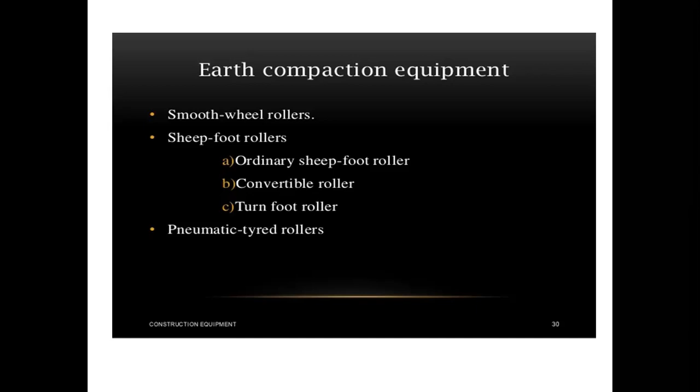What is a smooth wheel roller? These are made up of plain steel rollers and are self-propelled, weighing from 5 to 15 tons depending on the model, used for ordinary rolling work where deep compaction is not required. These are not used when deep compaction is required.

These rollers may have one front wheel and two rear wheels, with the rear wheels usually larger in diameter and the front one being wider. Smooth wheel rollers can be commonly seen on the roads. Each is made up of plain steel rollers of 5 to 15 tons each.

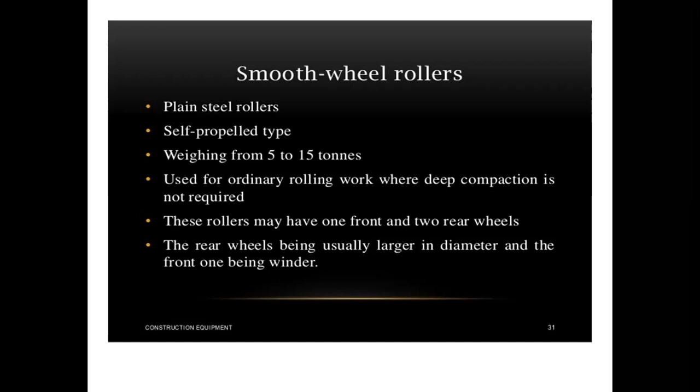The weight of the roller may be increased by filling water or sand ballast in the hollow cylinder. In this picture you can see the smooth wheel roller, with only one wheel in front and two rear wheels. These hollow cylinders or drums can be filled with ballast, sand, or water to increase the roller's weight.

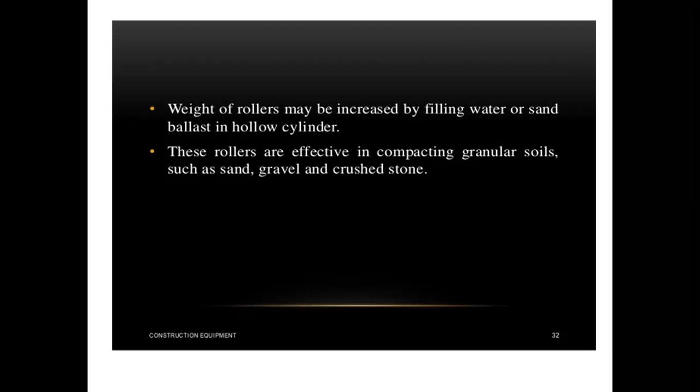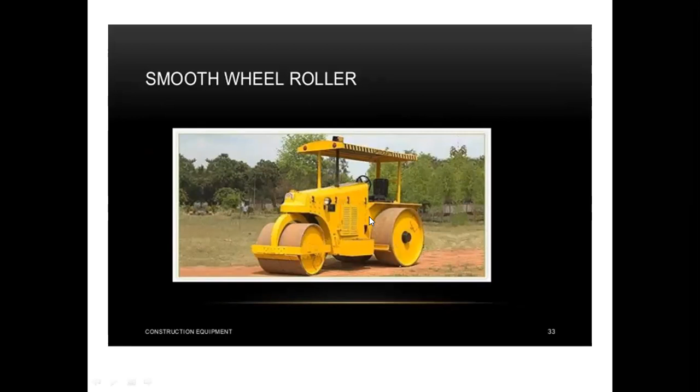These rollers are effective in compacting granular soils such as sand, gravel, and crushed stones. While laying a roadway, the subgrade of the soil is compacted using these smooth wheel rollers. The operator sits in the cabin, the wheel is circular in type, and there is only one front wheel and two rear wheels.

What are sheep foot rollers? These are used for compacting earthwork in embankments and canals where deep compaction into the layer of earth is required, since smooth wheel rollers cannot compact deeply. Sheep foot rollers can compact the soil deeply into the layer of earth.

This gives the best results in compaction when the soil is clay or predominantly cohesive and impervious. The sheep foot rollers may weigh up to 15 tons or more, traveling at a speed of 25 km per hour. As the roller moves over the surface, the feet penetrate the soil to produce a kneading action and pressure to mix and compact the soil from bottom to top layer.

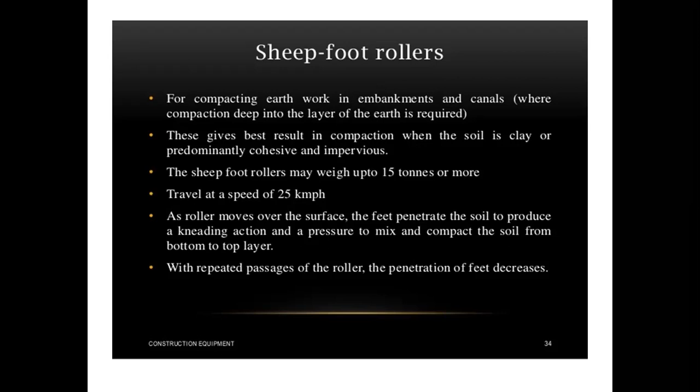As the sheep foot rollers move on the surface, the feet penetrate into the soil to produce a kneading action. With repeated passages of the roller, the soil beneath gets compacted, and the foot arrangements plunge into the earth, so that with repeated passes the penetration of the feet decreases simultaneously.

These are most suitable for compacting fine grained soil and well graded sands. Ballasting is done using either water, sand, or pig iron in order to increase the self weight.

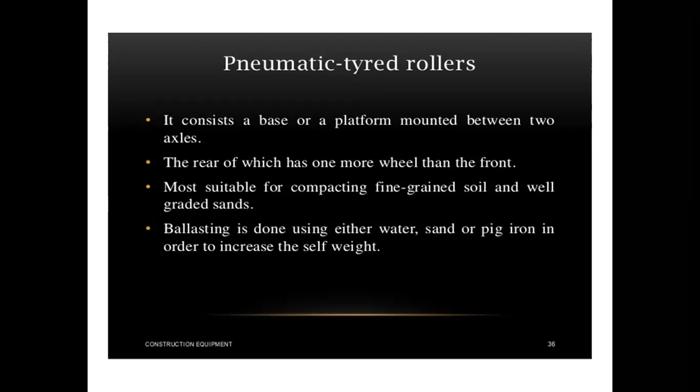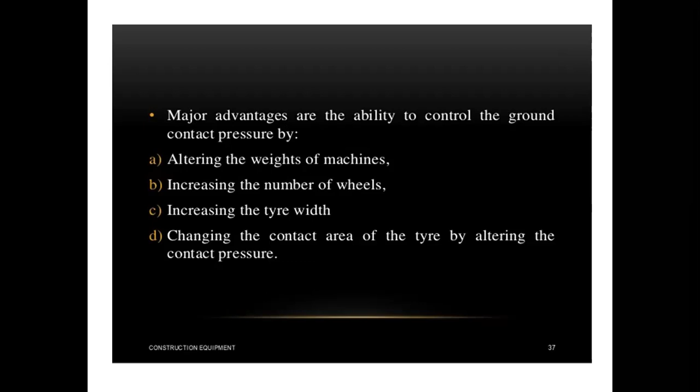The major advantages are the ability to control the ground contact pressure by altering the weights of machines, increasing the number of wheels, increasing the tire width, and changing the contact area of the tire by altering the contact pressure. They can alter their weights, increase the number of wheels, and increase the tire width, changing the contact area so these can improve the ability to control, and the ground surface has been compacted

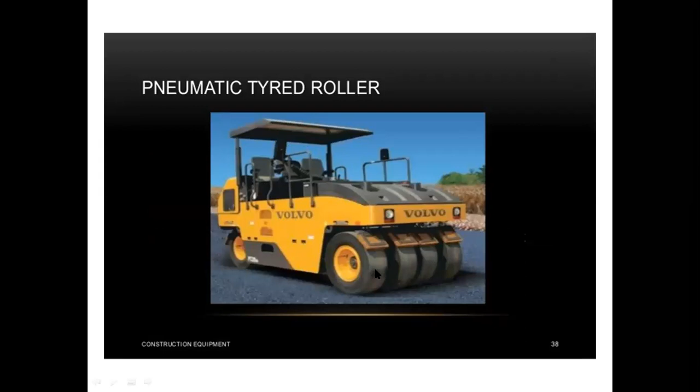So what are the different types of hauling equipment? What is hauling equipment? The equipment used for transportation of materials are known as hauling equipment, or simply haulers. Hauling equipment can move construction materials or soil particles from one place to another, using that energy to move material from one part of the site to another. These equipments used for hauling are known as hauling equipment.

Haulers may operate on roadways or railways. It involves transportation of building materials, carriage and disposal of excavated earth, and also haulage of heavy construction equipment. They can carry building materials like aggregates, sand, cement, and also dispose of excavated soil from the earth, dumping it from one part of the site to another, as well as hauling heavy construction equipment.

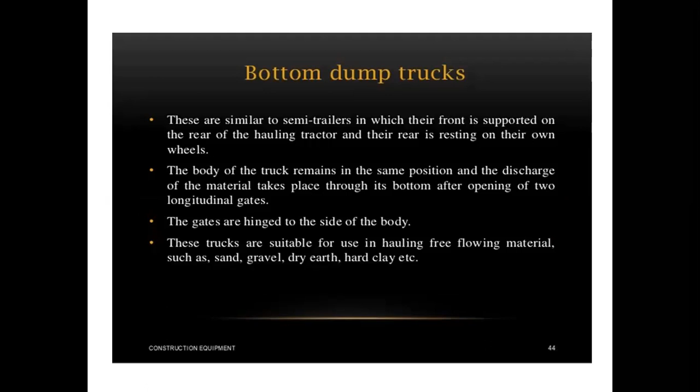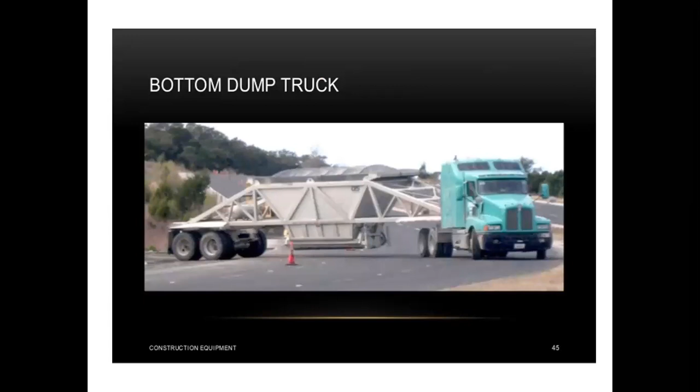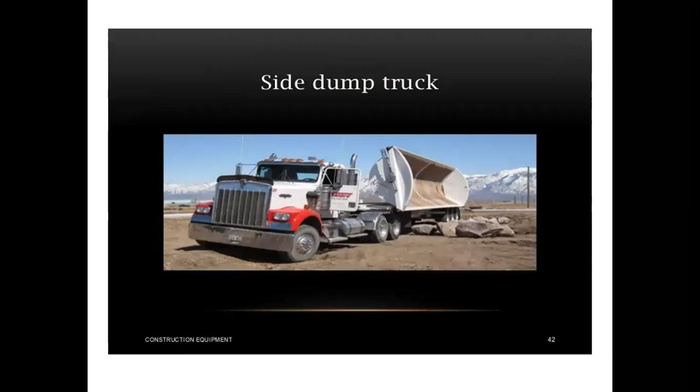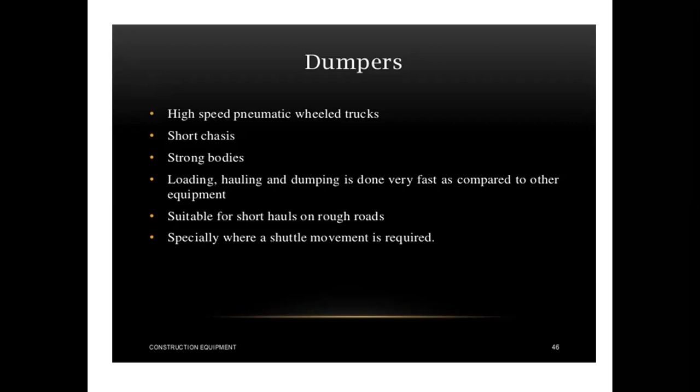These hauling equipment are suitable for short hauls on rough roads, especially where shuttle movement is required. Dumpers can load themselves, haul themselves, and dump the loaded materials easily at shorter distances. These are more effective compared to other hauling equipment.

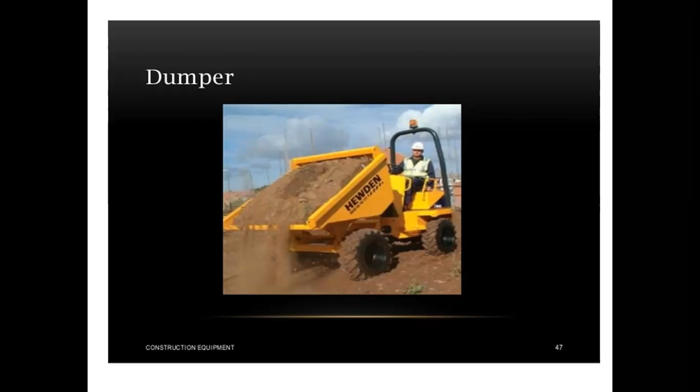Next, hoisting equipment. Hoisting is lifting a weight from one location and moving it to another location at a reasonable distance. These cranes can help carry heavy loads from one position to another position on the same site, but only a nominal distance.

Big projects such as construction of dams, industrial buildings, etc. require hoisting equipment, which is promptly used in such construction. Hoisting equipment includes jacks, winches, chain hoists, and cranes. A crane is the only single machine which, as a single piece, is capable of providing three-dimensional movement of the weight.

The major thing a hoisting equipment can do is lift a weight from one location and move it to another location at a reasonable distance.

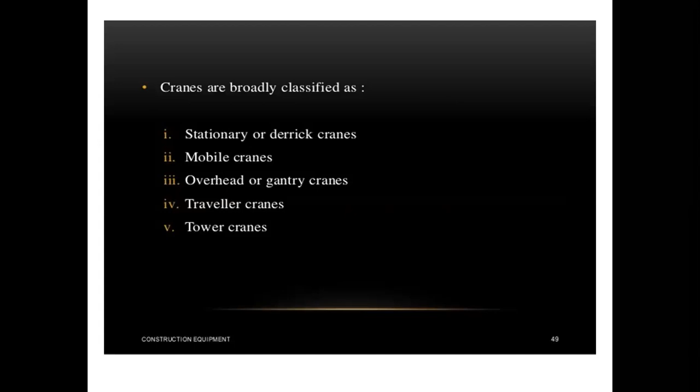Cranes are broadly classified as stationary or derrick cranes, mobile cranes, overhead or gantry cranes, traveler cranes, and tower cranes.

Derrick cranes consist of a mast, a boom, and a bull wheel on which the boom rotates about a vertical axis, and guys are the supporting members.

These derrick cranes can be operated based upon the machinery equipped to run on; they can be electrically operated, diesel operated, or diesel-electrically operated. The boom can revolve through 360 degrees.

This crane is used for heavy loads up to 200 tons. These derrick cranes can revolve through 360 degrees and carry heavy loads of 200 tons.

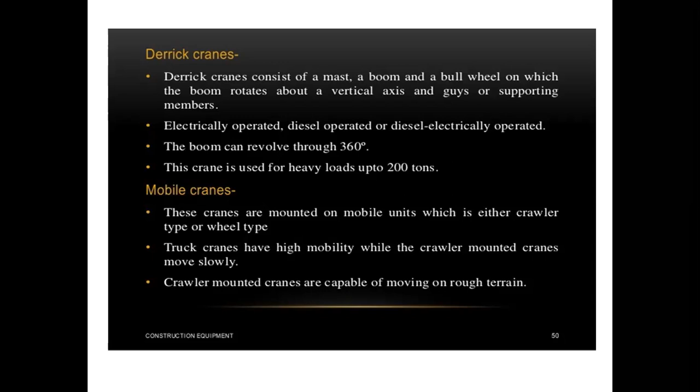Mobile cranes are mounted on mobile units, which are either crawler type or wheel type. Truck cranes have high mobility, while crawler-mounted cranes move slowly but are capable of moving on rough terrain.

These mobile cranes are carried by a vehicle beneath them, and they can travel easily from one position to another, having extra jack arrangements for the mobile cranes. So, overhead or gantry cranes.

They cover large service areas, freedom from floor obstructions, and three-way mobility, widely used in erection, foundry, steel plants, storage yards, and different types of industrial works.

These types of cranes consist of two main parts: the bridge and the crab. The bridge consists of two main girders fixed end to end and capable of moving on gantry rails. The crab consists of the hoisting gear mounted on the frame.

The frame itself is mounted on another set of wheels and capable of traveling across the main girder. This is the overhead or gantry crane. These overhead cranes can only move for reasonable distances.

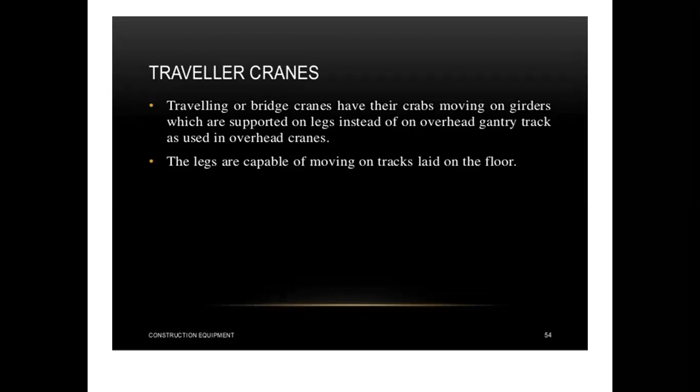These overhead cranes can lift heavy loads from one portion of the site to another, over a reasonable distance. Traveling or bridge cranes have their crabs moving on girders which are supported on legs, instead of on the overhead gantry track used in overhead cranes. The legs are capable of moving on tracks laid on the floor.

The tower crane is actually a derrick crane mounted on a steel tower. Tower cranes are usually used for industrial and residential high-rise buildings, and commonly used for assembly of industrial plants with steel structures. The main parts of a tower crane are the undercarriage, platform, tower with operator's cabin, and jibs. The tower has a truss structure welded from steel bars and channels.

So you can observe these are the tower cranes we have. This is the derrick crane which is mounted on a steel tower.

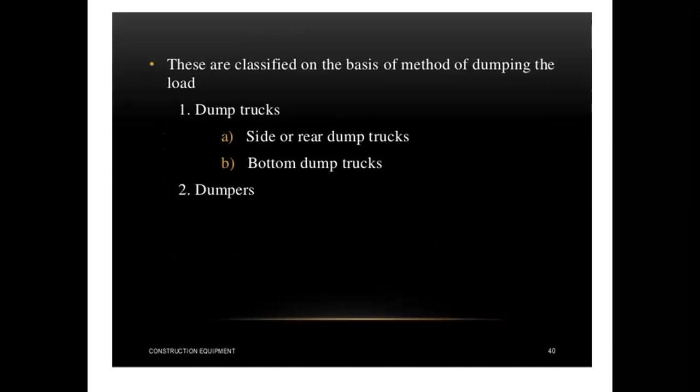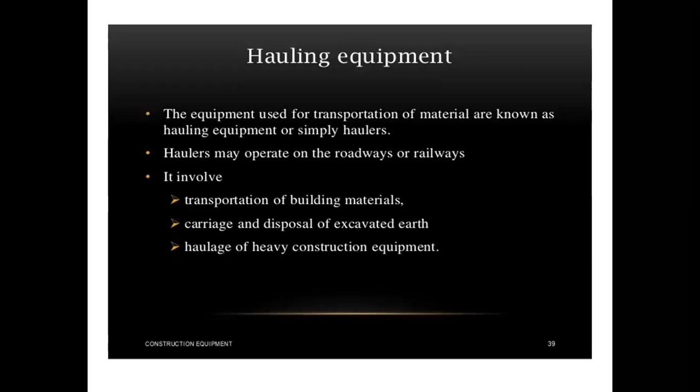In this lecture, starting with hauling equipment: hauling equipment is helpful for the transportation of materials, also simply called haulers. It involves transportation of building materials, transportation and disposal of excavated earth, and also heavy constructional equipment. These hauling equipment can carry other constructional equipment of heavy loads, such as tire rollers, sheep foot rollers, and smooth wheel rollers.

So the tower crane, which is actually a derrick crane, is used for both industrial and residential high-rise buildings. These are commonly used for assembly of industrial plants with steel structures. These tower cranes can also be used for construction purposes, such as constructing high-rise buildings. The steel tower which is supporting the derrick crane can be built as long as the steel tower is capable of holding this tower crane.

So while constructing high-rise buildings, these tower cranes play a major role economically, and also support construction so that high-rise buildings can be built smoothly and very effectively by using tower cranes.

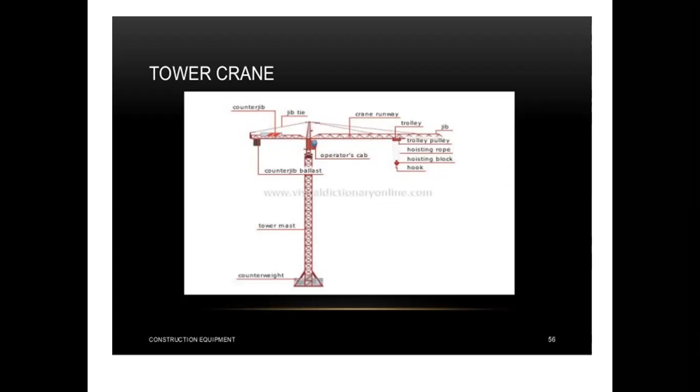They can carry heavy loads from one side of the site to the other with such ease. These tower cranes play a major role in construction of industrial and high-rise buildings, dams, and structural members, where canals and tunnels can be, where raw materials cannot have access for transportation from one portion of the site to the high side of the building. These tower cranes are helpful for construction purposes in high-rise buildings.

Conveying equipment: in the next class we are going to discuss what conveying equipment is and the types of conveying equipment.

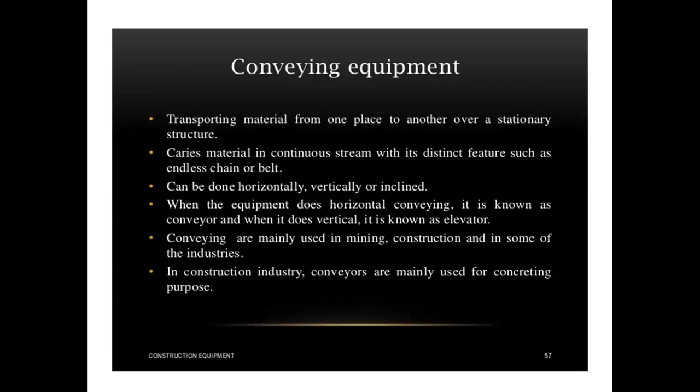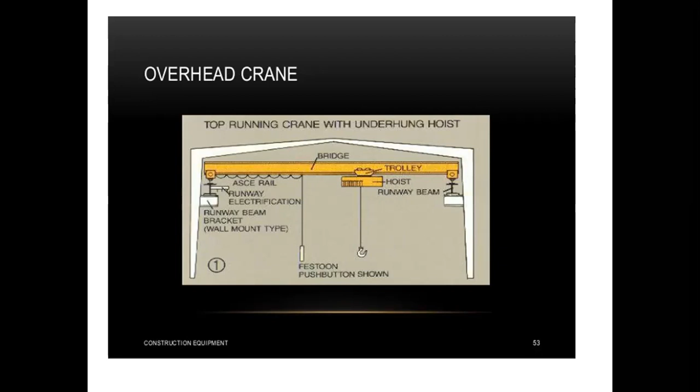And a push button is shown here — you can push the button so that the bridge can move its load loaded to the trolley. The hoist can move from one portion of the runway beam to another with ease, so that these overhead cranes, which underhung the hoist, can lift for certain distances while using overhead cranes and mobile cranes.

In mobile cranes, while digging up earthwork excavations, and also in canals or bridges, these mobile cranes are very helpful for building up a ropeway from one end of the canal to the other end. Mobile cranes play a major role by transporting cables or whatever raw materials are required for construction, which can be lifted and moved forward to the other direction of the canals.

So these mobile cranes also play a major role in the construction of canals, and these mobile cranes can be carried over a hauling equipment which has the capacity, with side legs for supportive purposes. These legs can extensively support the loads that are lifted and moved, so that the hauling equipment carrying the mobile cranes cannot be disturbed or moved from one portion to another without disruption.